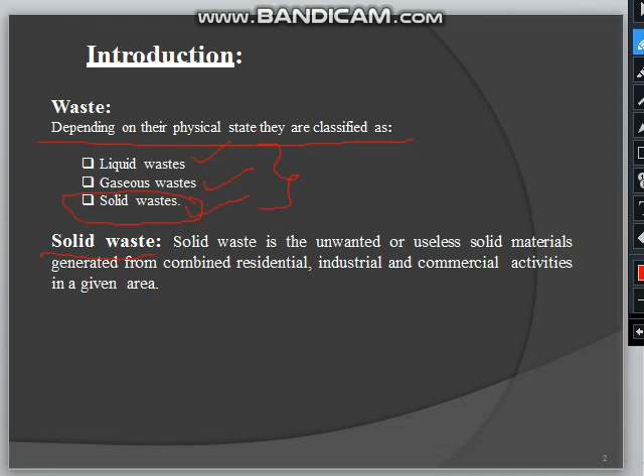So next, coming to solid waste management. Solid waste management is the process of collection, transportation, and disposal of solid waste in a systematic, economic, and hygienic manner. So we can simply say that solid waste management is the process of collecting, treating, and disposing of solid material that is discarded because it is no longer used. It is the process of collection, transportation, and disposal of solid waste.

Next, coming to the classification: solid wastes are classified into majorly two types, one based on their source of origin, and one based on physical nature. Based on their sources of origin, they are residential wastes, commercial wastes, industrial wastes, municipal wastes, and finally agricultural wastes.

So generally, if you see, most of the solid waste is generated from the communities. Communities are nothing but the residential apartments, and then we can get it from commercial. So in this source of origin, residential waste and commercial waste give the major solid waste. Next, industrial waste, municipal waste and agricultural wastes have more preference in solid waste management.

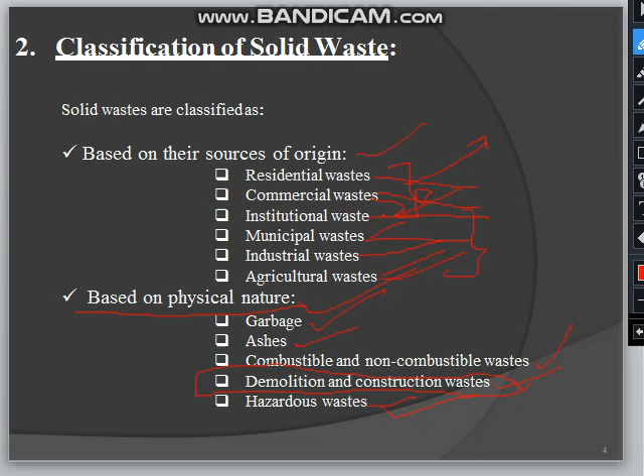So now, the solid wastes based on physical nature are garbage, ashes, combustible and non-combustible wastes, demolition and construction wastes, and hazardous wastes. Let us discuss each and every one. The first one is garbage.

Garbage includes all sorts of organic wastes obtained from kitchens, hotels, restaurants, and we can say garbage is nothing but all waste food articles, vegetable peelings, fruit peelings, etc. These wastes are organic in nature. Simply we can say garbage is organic in nature.

The wastes which are organic in nature decompose quickly. That means garbage can decompose very quickly, producing foul odors and health hazards. Also, garbage may result in the breeding of flies, mosquitoes, insects, etc. Hence, garbage must be disposed of properly and quickly, because, as I told you, garbage is organic in nature, so it is quickly decomposable.

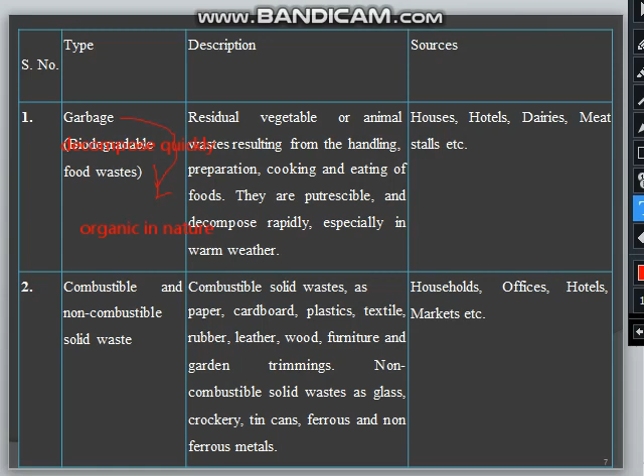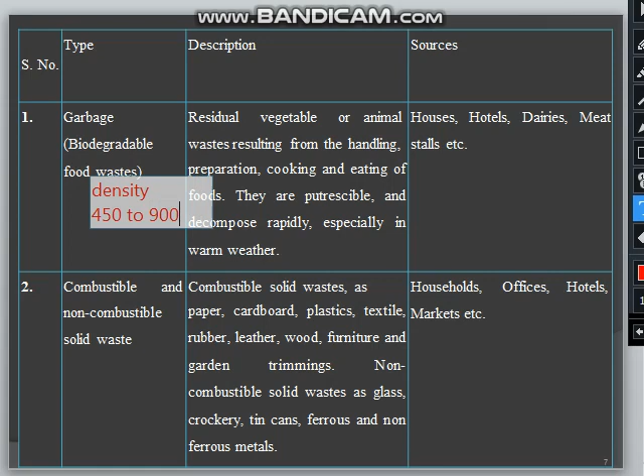When it is scientifically processed and composted, we may obtain some valuable products like grease and fertilizer from the garbage. So we have to prefer the scientific process to compost the garbage. Generally, the density of garbage is 450 to 900 kg per cubic meter.

So generally, the major sources are houses, hotels, dairies, meat stalls, etc. You mainly need to understand that garbage is organic waste obtained from kitchens, hotels, restaurants. It is organic in nature, so it can decompose very quickly, and we have to dispose of it properly and quickly. We have to prefer the scientific process for composting, so that we can get products like grease and fertilizer. The density of garbage is 450 to 900 kilograms per cubic meter.

Next, coming to the second one, combustible and non-combustible solid waste. We get it mainly from households, offices, hotels, markets, etc. These are the sources. Generally, combustible solid waste is paper, cardboard, plastics, textiles, rubber, leather, wood, furniture, and garden trimmings. Non-combustible solid wastes are glass, crockery, tin cans, ferrous and non-ferrous metals.

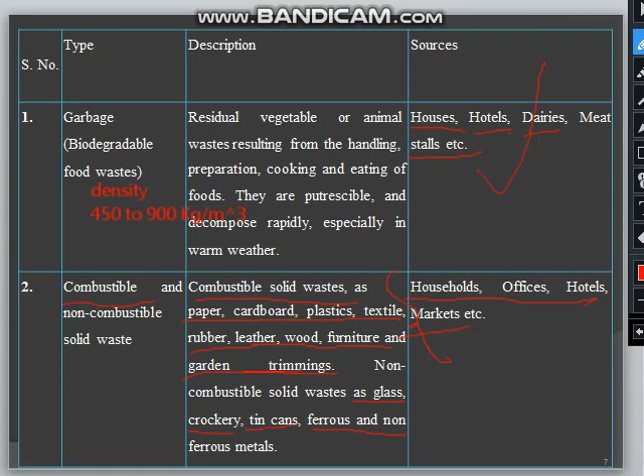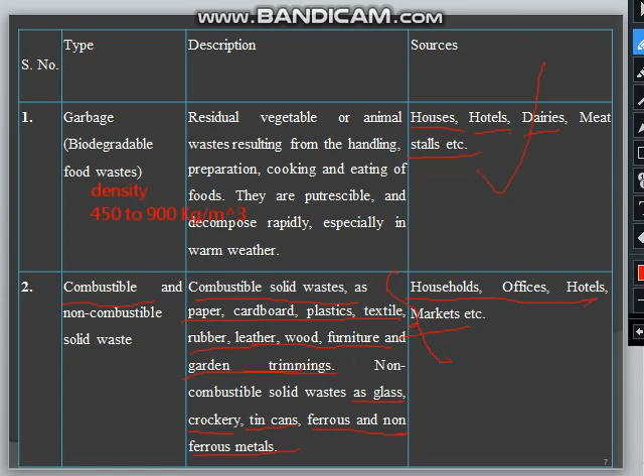So see here, there is a difference between combustible and non-combustible solid waste. The sources are households, offices, hotels and markets only. But in combustible solid wastes, paper, plastic and garden trimmings are very important, whereas in non-combustible solid waste, glass, tin cans, ferrous and non-ferrous metals are present. So while composting, we have to take more caution, and very quickly we have to compost the combustible waste.

Next, coming to the third one, ashes.

Ashes: generally the incombustible ashes from household heaters. Generally, in the olden days, there were what we call chullas. By using sticks, we lit the chullas. The incombustible ashes from household heaters, like from chullas, are called ashes.

Although nowadays the quantity of ashes is getting reduced in modern urban homes due to increasing use of cooking gas, kerosene oil, stoves, and lesser use of cooking coal or firewood, so nowadays there will be less ashes, because I told you that generally we are using gas and kerosene oil and stoves, but in olden days cooking coal or firewood was used. From that, majorly the ashes will be generated.

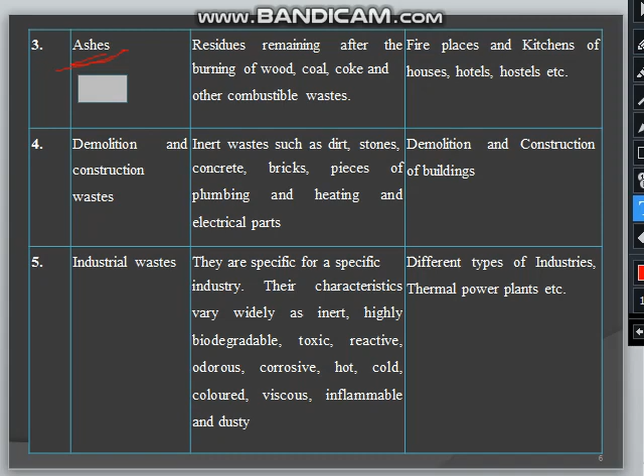So the density of ashes will be 700 to 850 kg per cubic meter.

Okay. Next, coming to the demolition and construction waste. I told you that nowadays, if you see in major urban areas, the aging of the buildings is more. Due to the aging of buildings, new construction or renovation of a building will take place. To renovate the building or for new construction, definitely we have to collapse the building. So more demolition and construction waste will be generated.

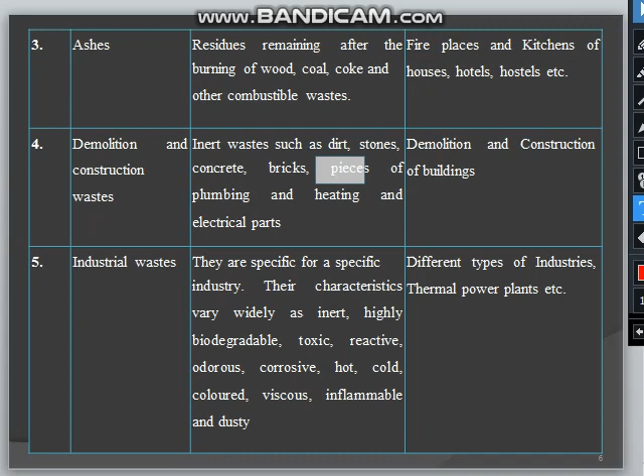So what does demolition and construction waste mean? Such as stones majorly, concrete, bricks, pieces of plumbing, heating and electrical parts. These are the major construction and demolition wastes. These wastes have to be recycled so that we can reuse them. Okay. So demolition and construction waste is also one of the important solid wastes.

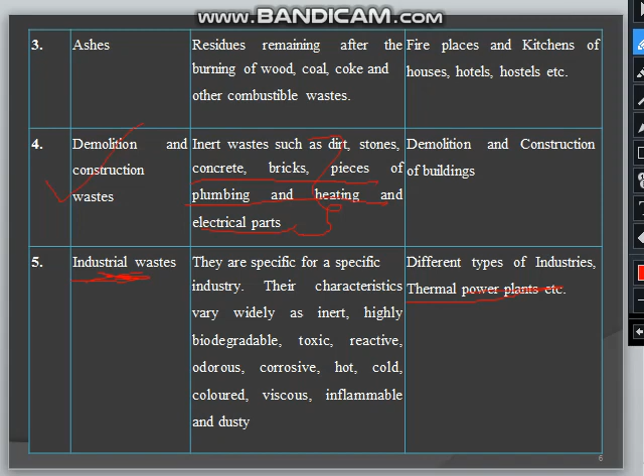Okay. Next, coming to the industrial wastes. Industrial waste's major sources are nothing but the thermal power plants, we can say, and other types of industries. They are specific for a specific industry. Their characteristics vary widely: inert, highly biodegradable, toxic, reactive, odorous, corrosive, hot, cold, colored, viscous, inflammable, and dusty. These are the various characteristics of industrial wastes.

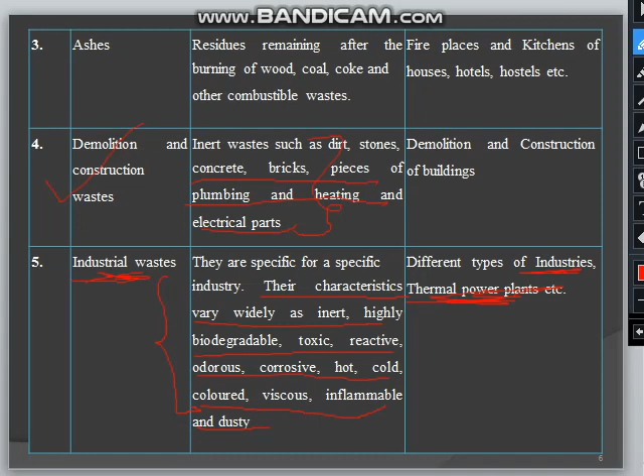So, industrial wastes also have to be disposed of very carefully in a scientific process, so that the effect on nearby communities and air pollution will be reduced. Okay.

Next, coming to the engineered systems for solid waste management. Nowadays, in each urban area and villages also, solid waste management is being involved very much. Okay. The first step will be generation of solid waste by the community. Generally, the solid waste is generated by the community. This waste generated by the community is collected into the dustbin.

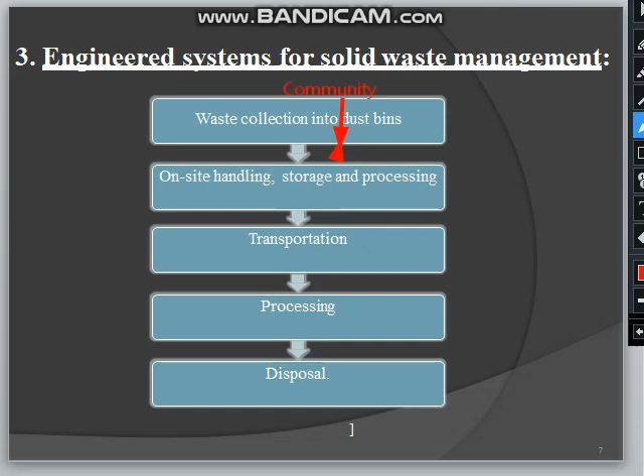So community to collection, and here collection will be made through dustbins, you need to understand. And then this collection goes to on-site handling, storage and processing. Here on-site handling means there will be dry waste and wet waste. These two things are separated and stored separately. That is the on-site handling, storage and processing, and then transportation. Generally, the transportation is through a hauling system.

Next, processing. The next stage will be processing, and we can say recovery also. Processing and recovery. In this stage, it involves segregation of waste. Okay. Next, the last one is disposal.

Okay. In solid waste management, there are the following steps. The first one is the generation of solid waste by the community. Generally, the rate of generation is 0.4 to 0.8 kg waste per person per day. So this much waste, 0.4 to 0.8 kgs, is generated per person per day.

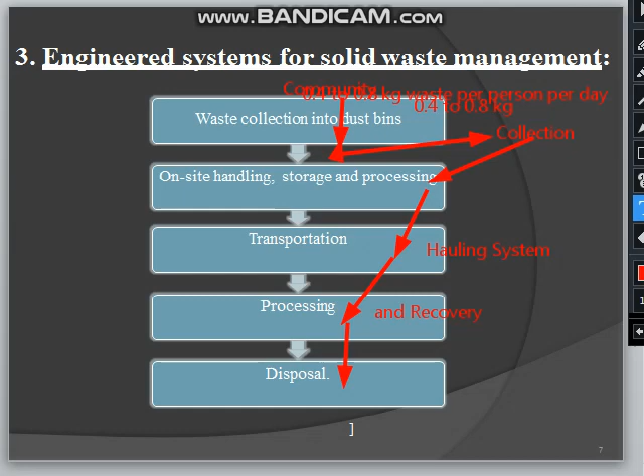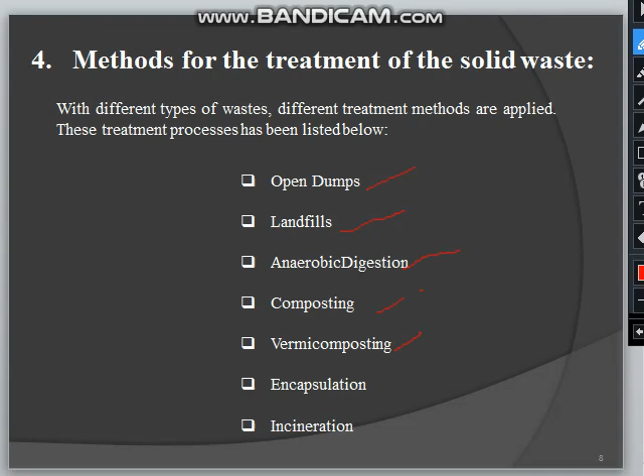Next, coming to the methods of treatment in solid waste management. Nowadays there are different types of wastes, and different treatment methods are applied. These treatment processes are listed below: open dumps, landfills, anaerobic digestion, composting, vermicomposting, encapsulation, incineration.

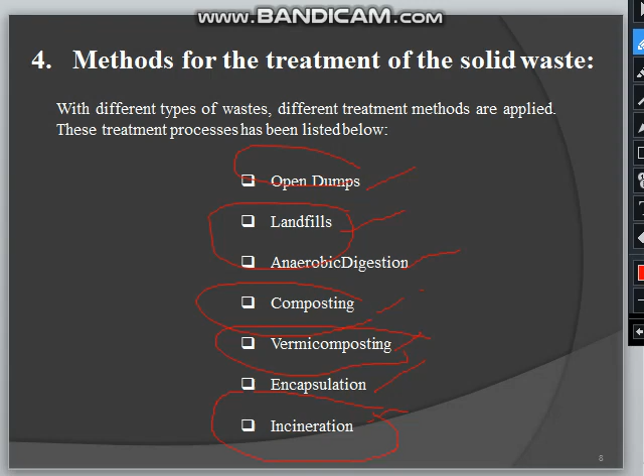In this, majorly incineration and thermal pyrolysis, this is very important, and composting, vermicomposting, open dumps and landfills. These are the different methods for the treatment of solid waste: open dumps, landfills, anaerobic digestion, composting, vermicomposting, encapsulation, incineration. Let us discuss each method of treatment of solid waste. Okay, first, open dumps.

Generally, open dumping refers to the uncovered areas that are used to dump solid waste of all kinds. Generally, solid waste may be rubbish, garbage, combustible, or incombustible. All these types are dumped. Another one is that the waste is untreated and not segregated.

Because I told you that open dumping means there is a vacant land. In the vacant land, all kinds of waste like dry waste and wet waste, garbage, rubbish, combustible, non-combustible, demolition and construction waste or industrial waste, are combinedly poured into the vacant land, so this waste is untreated. There is no segregation that takes place in an open dumping site.

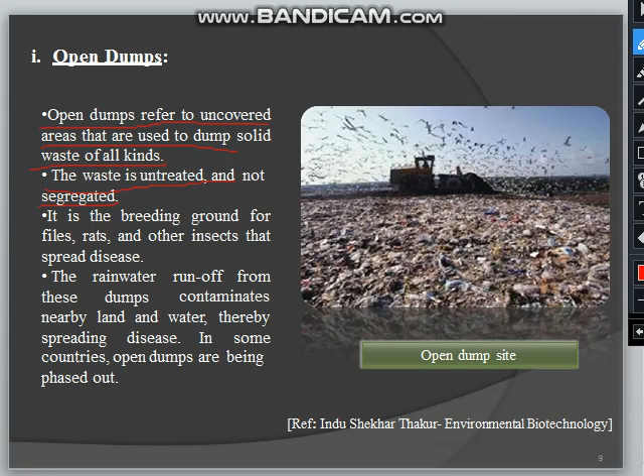Here you can see that all types of waste are present. No segregation takes place. It is a breeding ground for flies, rats, and others in the surroundings. In open dumping, definitely there will be flies, rats, and other insects that will spread diseases. The rainwater runoff from these dumps contaminates nearby land and water, thereby spreading diseases. In some countries, open dumps are being phased out.

So it leads to, one, the land and nearby water also being contaminated. Another thing is that it leads to the spreading of diseases, so in some countries it has been phased out. So open dumping is also one of the important methods of treatment. The second one is the landfill.

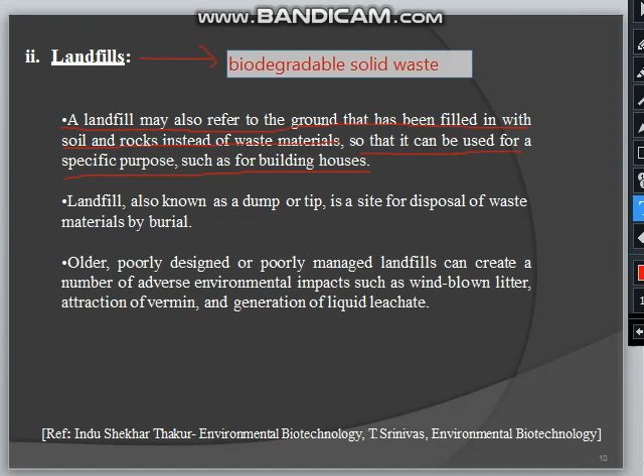Generally, a landfill may also refer to ground that has been filled with soil and rocks instead of waste materials, so that it can be used for a specific purpose such as building houses. Generally, sanitary landfilling is used to dispose biodegradable solid waste. This landfill is majorly used for biodegradable solid waste. Refuse is carried and dumped into the low-lying area, and it is covered by a good earth layer, so that refuse is not directly exposed.

The waste is stabilized by aerobic as well as anaerobic bacterial processes. When waste is stabilized by the aerobic process, there is a presence of free dissolved oxygen. When the waste is stabilized by the anaerobic process, there is an absence of free dissolved oxygen. The refuse in managed landfills may usually get stabilized within a period of 2 to 4 months. About 90% of Indian refuse is disposed in this manner only.

Landfill is also known as a dump or tip. It is a site for disposal of waste material by burial. Older, poorly designed or poorly managed landfills can create a number of adverse environmental impacts such as windblown litter, attraction of vermin, and generation of liquid leachate. So I told you that sanitary landfilling will lead to some environmental problems. Here, generation of liquid leachate.

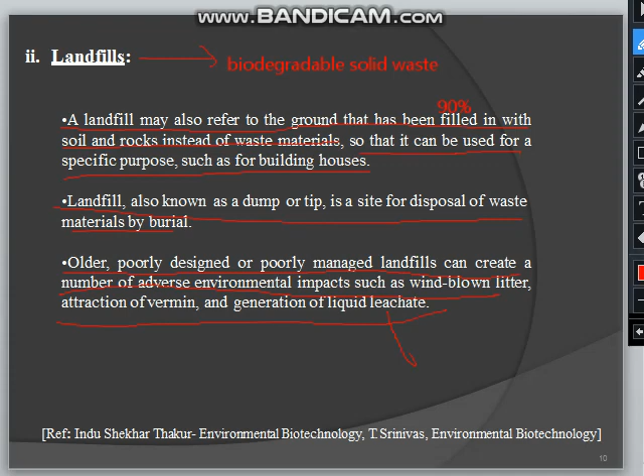What does leachate mean? During the rainy season, excess water seeping through the area may come out of the dump yard as a colored liquid called leachate. Leachate is a highly poisonous and polluted liquid. So while doing sanitary landfilling, this problem will occur, majorly in the rainy season. And also gas production.

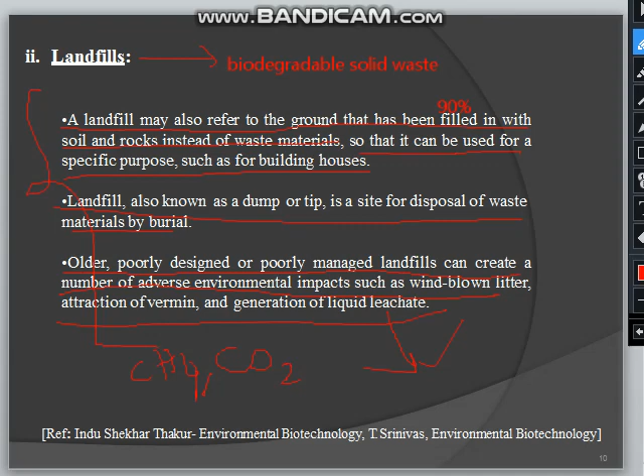In most cases, over 90% of the gas volume produced from the decomposition of solid waste consists of methane and carbon dioxide. In large sized landfills, the gas evolved due to decomposition of refuse may be collected by installing gas recovery wells. So landfilling is nothing but burying waste into the land. After that it will lead to some consequences like liquid leachate and environmental problems. That's about landfilling.

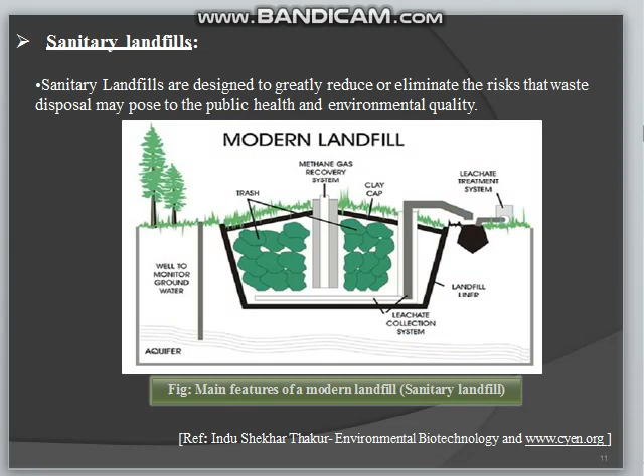Composting is the biological decomposition of organic waste under controlled aerobic conditions. Landfilling is aerobic or anaerobic biological decomposition, but composting is only under aerobic conditions. Aerobic means there is a presence of free dissolved oxygen. Industries such as paper, agricultural, and food processing give out wastes which are almost 100% organic. So in composting, majorly organic waste will be there. This organic matter can be composted to yield good manure. So this is also important.

Compost is the end product obtained after subjecting the organic fraction of solid waste to aerobic or anaerobic decomposition to yield humus-like solid, carbon dioxide, water vapor, and energy. Generally, human waste along with solid waste is mixed and converted into compost, which is used as manure. This decomposition can be effected under aerobic conditions. The final end product is called humus, used as a fertilizer.

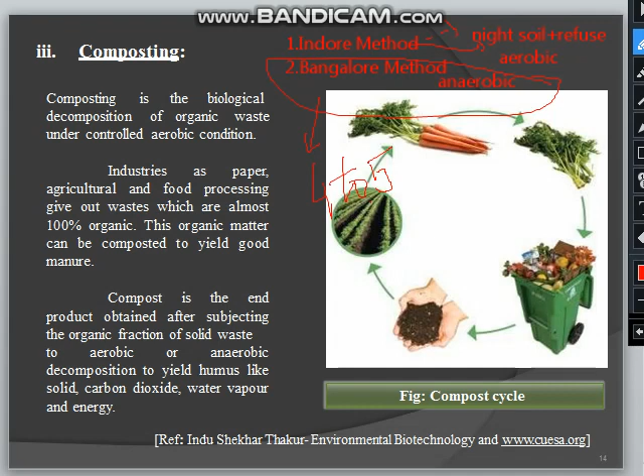The refuse and night soil in this method are piled up in layers in an underground earthen trench. This mass is covered at top by a layer of earth about 15 centimeters deep and is finally left over for decomposition. After 4 to 5 months, the refuse gets fully stabilized and changes into a brown colored, odorless, innocuous powdery mass called humus. Finally, we get humus. This is very important.

So, composting is the biological decomposition of organic waste under controlled aerobic conditions. Here, two methods are there: the Indore method and Bangalore method. Both use night soil plus refuse as a mass. Indore method is an aerobic method. Bangalore method is an anaerobic method. Use the Bangalore method only.

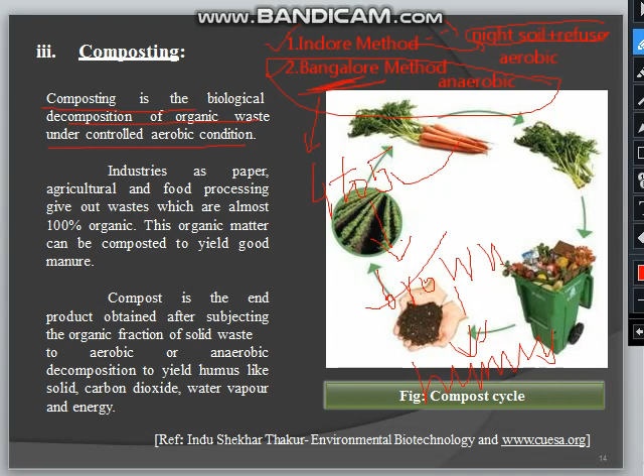Generally, here the refuse plus night soil is piled up in layers in an underground earthen trench. This mass is covered by a top layer of about 15 centimeters deep and finally left over for decomposition. In about 4 to 5 months, the refuse gets fully stabilized and changes into a brown colored, odorless, powdery mass called humus. So that is all about the composting.

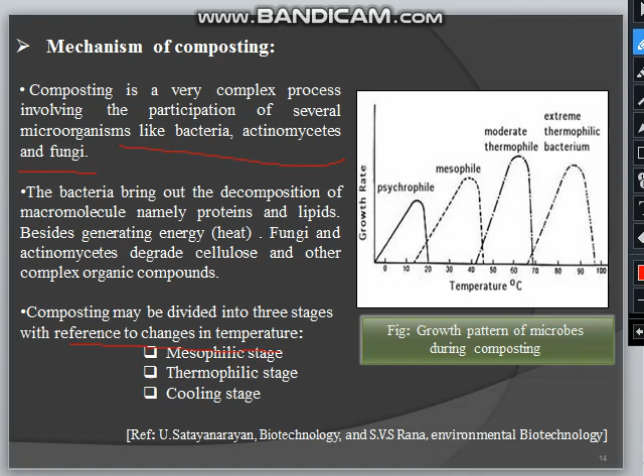So mechanism of composting you can see here. Composting is a very complex process involving the participation of several microorganisms like bacteria, actinomycetes and fungi. Composting may be divided into three stages with reference to changes: the mesophilic stage, thermophilic stage, and cooling stage.

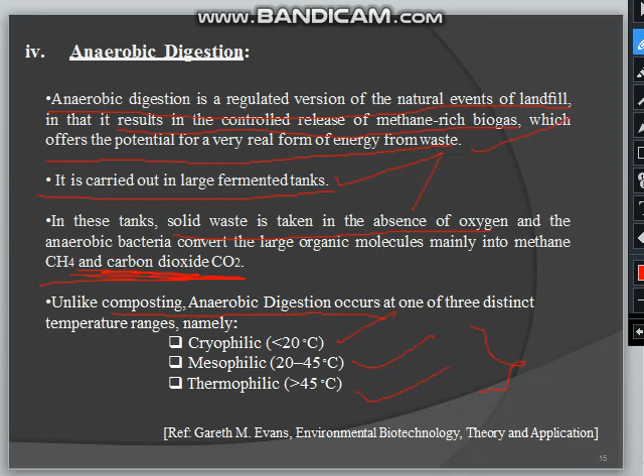Next, coming to vermicomposting. Vermicomposting is a simple biotechnological process of composting in which certain species of earthworms are used to enhance the process of waste conversion and produce a better end product. So here, mainly earthworms are utilized.

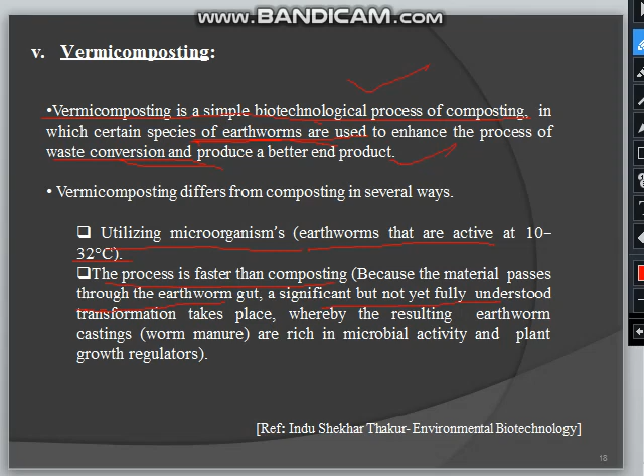Utilizing organisms like earthworms that are active at 10 to 32 degrees centigrade, the process is faster than composting, because the material passes through the earthworm gut, a significant but not yet fully understood. Transformation takes place. So vermicomposting is composting using earthworms, a biotechnological process.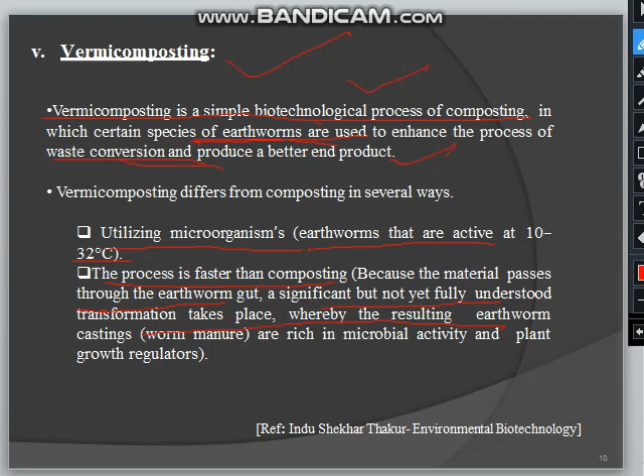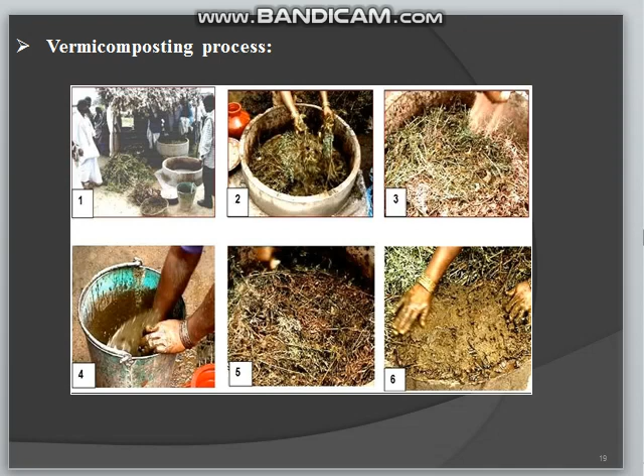Next one is incineration. Incineration is the most common thermal treatment process. It is burning of the waste at a temperature of 1000 degrees centigrade plus or minus 100 degrees centigrade in the presence of oxygen to eliminate all odors and ensure good combustion. Incineration is an aerobic process, simply because only in the presence of oxygen will the burning of the waste be done.

After incineration, the wastes are converted into carbon dioxide, CO2, plus water vapor, H2O, plus ash. It converts hazardous organic substances into less hazardous components. So incineration is also one of the important methods in India.

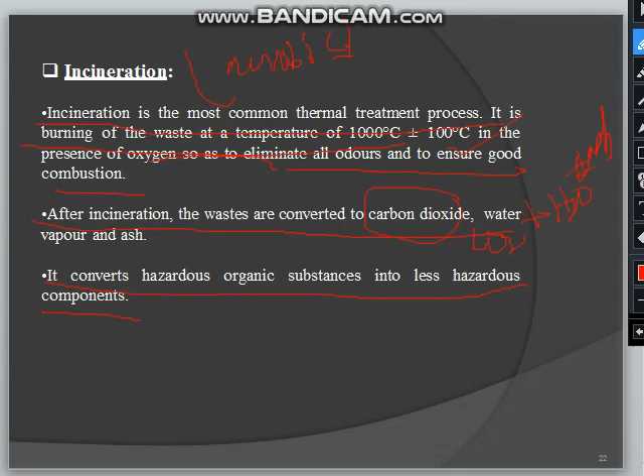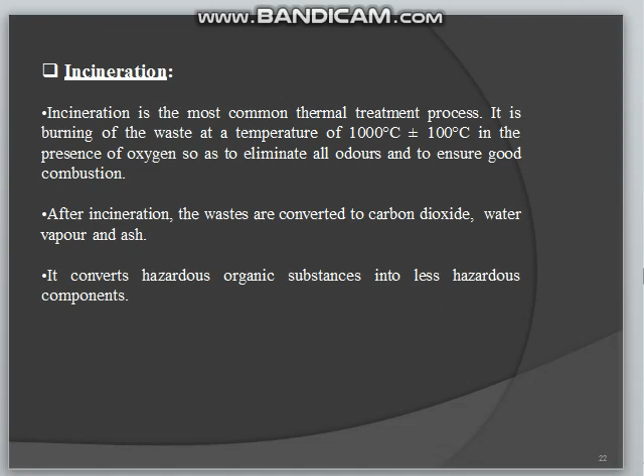And generally there is a term called pyrolysis. Pyrolysis is nothing but burning in the absence of air. Incineration is done in the presence of air, that means in the presence of oxygen. Pyrolysis is in the absence of air. Generally, rubber and plastic waste are disposed of by this method.

Upon heating in an oxygen-free atmosphere, most organic substances can be split through a combination of thermal cracking and condensation reactions into gaseous, liquid, and solid fractions. This process is called pyrolysis or thermal pyrolysis. When organic solid waste is pyrolyzed, three products will be produced at different stages and different temperatures: carbon dioxide, methane, and hydrogen.

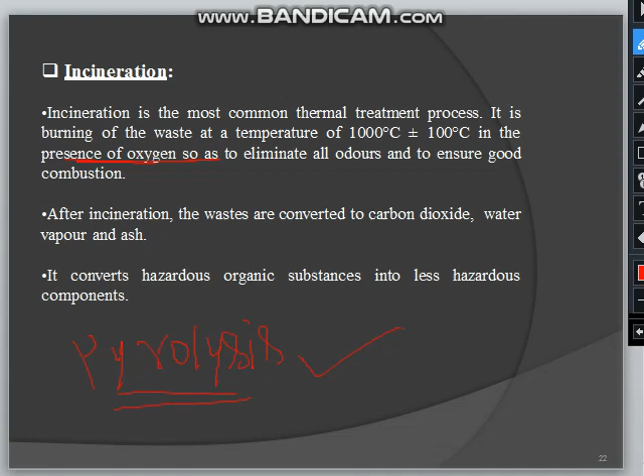Next, management of solid waste. The fundamental objective of waste processing is to reduce the amount of waste through recycling and disposal of waste in a way that does not impair environmental conservation. There are four R's that should be followed for waste management: refuse, reuse, recycle, and reduce.

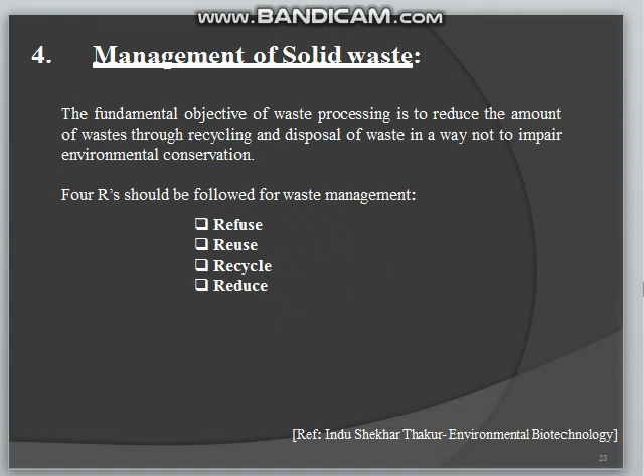The management of solid waste is done according to its nature: management of medical solid waste, non-degradable solid waste, hazardous waste, non-hazardous and biodegradable solid waste, and electronic waste, that's e-waste. Nowadays e-waste is increasing, from electronic gadgets like cell phones, mostly old and aged ones.

Management of medical waste: hospital waste is generated during the diagnosis, treatment, or immunization of human beings or animals, and in research activities in these fields. Here the treatment options are incineration and sanitary landfill.

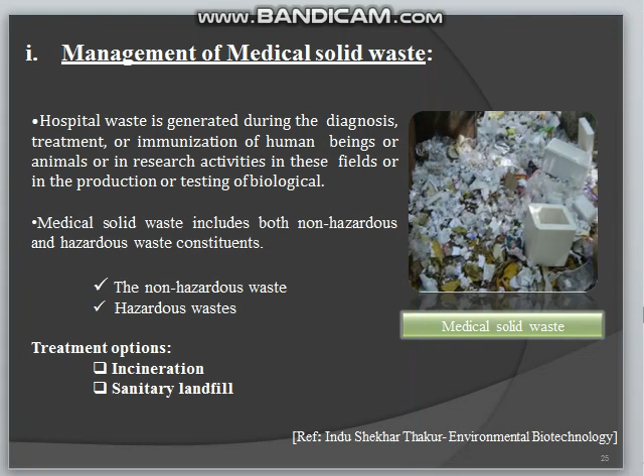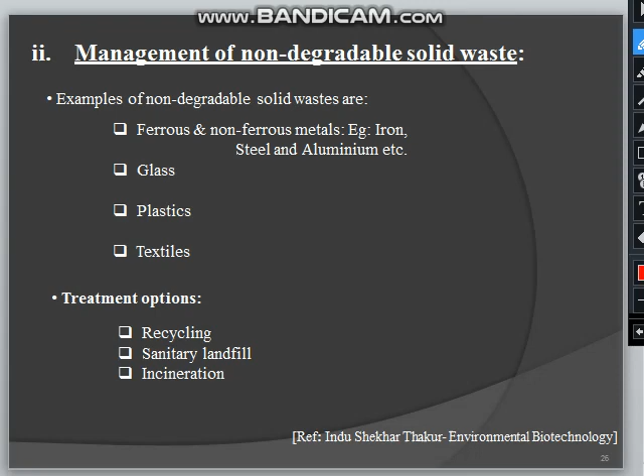Next, management of non-degradable solid waste. Examples are ferrous and non-ferrous metals like iron, steel, and aluminum, glass, plastics, and textiles. The treatment options are sanitary landfill, recycling, and incineration.

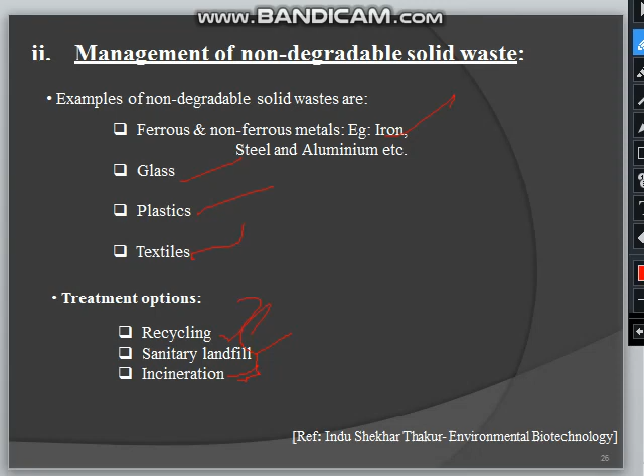Coming to the management of non-hazardous and biodegradable solid waste: open dumping, landfill, anaerobic digestion, composting, and vermicomposting are the major options. Open dumping is generally not preferred. Anaerobic digestion or composting will be the best options for non-hazardous and biodegradable solid waste.

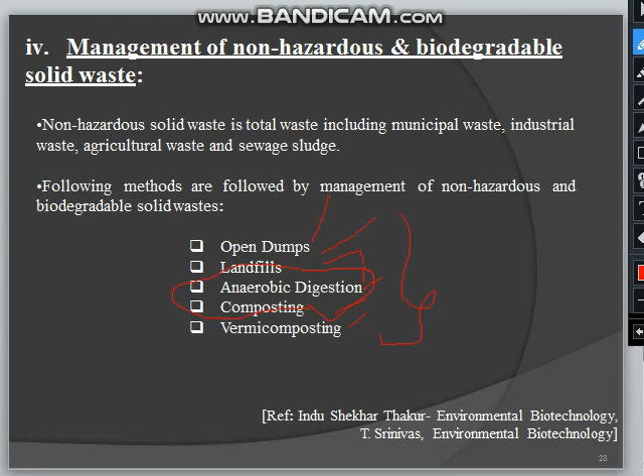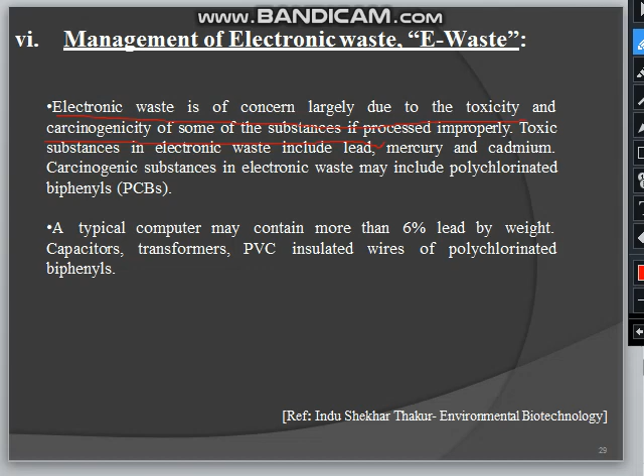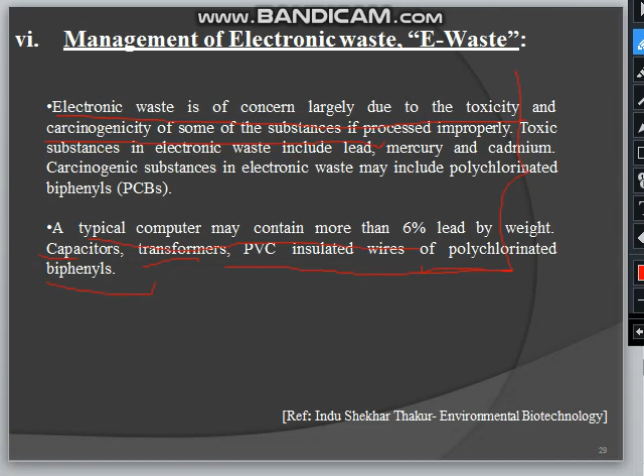Finally, e-waste. Electronic waste is a large concern due to the toxicity and carcinogenicity of some of its substances. A typical computer may contain more than 6% lead by weight, capacitors, transformers, PVC insulated wires, of polychlorinated biphenyls. E-waste is increasingly generated nowadays.

What are the treatment methods for e-waste? Incineration, sanitary landfill, and encapsulation. These are the treatment options for e-waste. So that is all about solid waste management.

In this lecture, we mainly discussed what waste is. I told you that solid waste is dry refuse, and then we discussed garbage, the organic waste obtained from kitchens, hotels, and restaurants. Then rubbish, which may be combustible, like paper, plastic, textile, or incombustible, like glass, metal, or masonry. And then ashes, the incombustible ashes from household heaters.

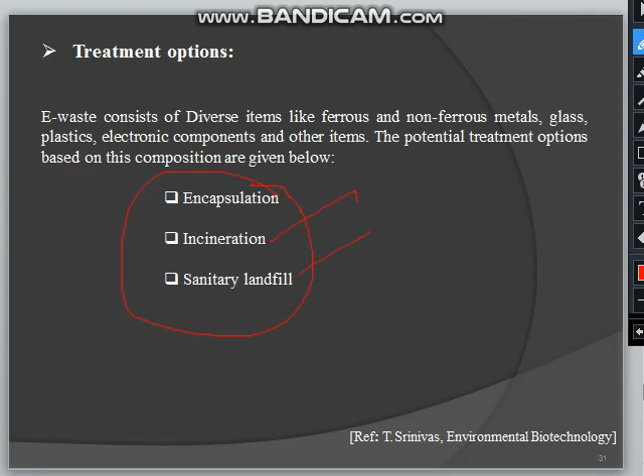Then we discussed the classification of solid waste, like municipal, residential, commercial, industrial, and hazardous. We discussed the steps involved in solid waste management: generation by the community, collection, transportation, processing, and final disposal. Then we discussed treatment methods like sanitary landfilling, incineration, composting, and anaerobic digestion, and the different types of waste.